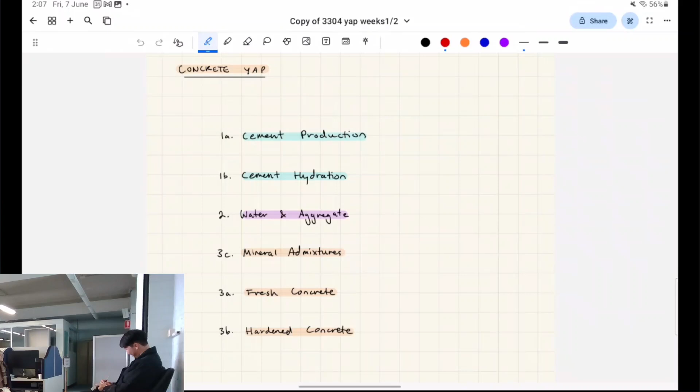Well, basically, here were the week one contents, general topics. Then week two actually went really fast, they covered two topics in one week because they wanted to get to the mechanical properties. I heard they delayed it last year. I think since I was part of Prash's tute, he accelerated us, so we got onto the mechanical properties, but I can't speak for other tutes, they might have happened differently.

Are you guys in Prash's class? No, lucky, I know your guy's pretty decent. It's actually okay, yeah. What about your workshop? Karen. Are they okay? Yeah, Karen. Is she okay? He's okay.

Okay, because I'm trying to figure out how fast I should go. He goes too quickly, like I can't. I feel like my complaint is that he goes too quickly, I couldn't write down anything.

So you guys have all done 2101, right? That's a big part of this first part of the course. What's 2101? Construction, yeah, it's the one you said you did well in. Yeah, I don't know.

I'll let you copy these down, there's not much to write here. But these are based on the names of the lecture files, right? I've also got these in my concrete Google Drive folder, so if you miss it, you can put it down. So that production's a little bit different.

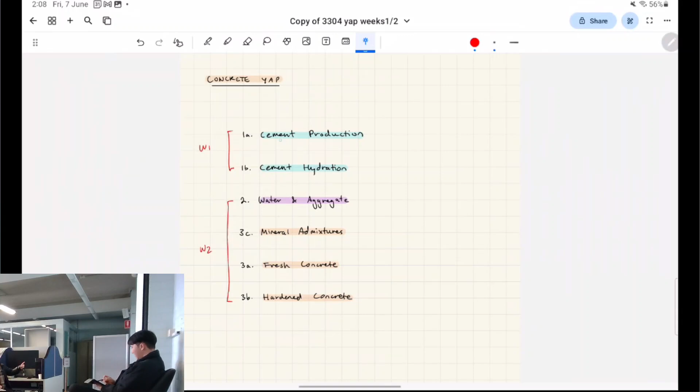Why is it CAB? Is there a reason for that? Three C, three A, three B. Oh sorry, my bad. So basically, I'm gonna teach you 3C before 3A and 3B because it makes more sense in my head, because it's like admixtures before you pour it.

No, because they basically tell you about the ingredients of concrete in this area, right? And then 3C is kind of more related to the ingredients of concrete, like an optional ingredient. But then fresh concrete is about 2101 site processes, and 3B is actually something completely new, it starts going towards mechanics of solids. So I think it makes more sense to order it this way because this is all material science.

So 1A is cement production, right? So basically, as listed here, the ingredients in concrete, you've got your cement, water, and aggregate, made up of coarse and fine aggregates.

It's like baking a cake, right? So concrete is like a cake, and then this is like your egg, water, or which would be like milk or something, I don't know. And then aggregate might be like flour or something. These are all just basic ingredients in a cake, and there's different ways to bake a cake. Then when we talk about admixtures later, they'll be like vanilla extract or these kind of fancy advanced techniques or ingredients that you can add into a cake.

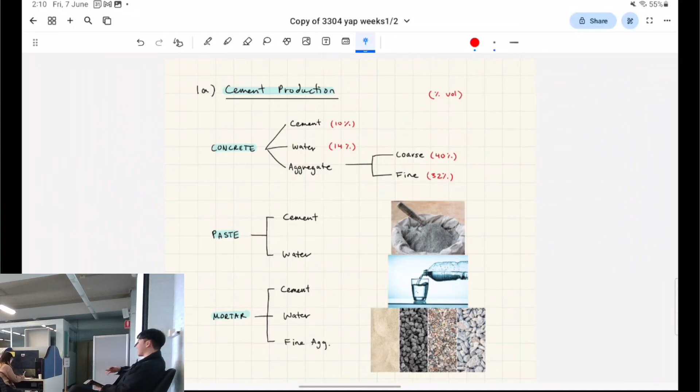The cake analogy will kind of run as we keep talking about it. There's actually a few ways we can compare concrete to making a cake, so it's quite interesting.

I've just included the rough volume of things, so the aggregate will make up the majority of the volume in concrete, right? If you look at concrete, you'll see a lot of the rock particles, that's just the volume you can see. Because cement, if you think about it, will be the most expensive ingredient in concrete. So if you want to save costs for making concrete, you want to think about how we can reduce that most expensive ingredient, I'll talk about that in a bit. And water's the cheapest ingredient, so in terms of cost, water will be cheapest, then aggregate, then cement.

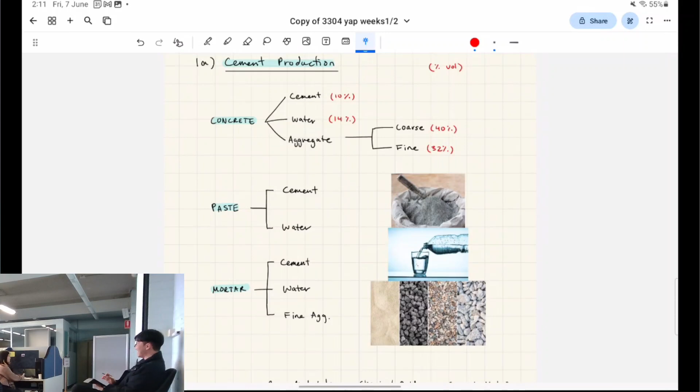Shut up. Okay, whatever. Just pretend this adds up to 100%. Hypothetically. Okay.

So you might have heard the words paste and mortar, if you watched the first lecture. Paste is kind of like used maybe just to patch up a crack in the wall. It's got a lot of adhesive properties, and it's mainly used for aesthetic reasons, because if there's a small hole in the wall, you just patch it up. It doesn't need to be structural.

Mortar is getting a little bit more structural. So in between bricks, you put some mortar, but it has a little bit more structure to it. It's like dough - if you have your flour and water and a little bit of egg in the cake analogy, that would be like mortar.

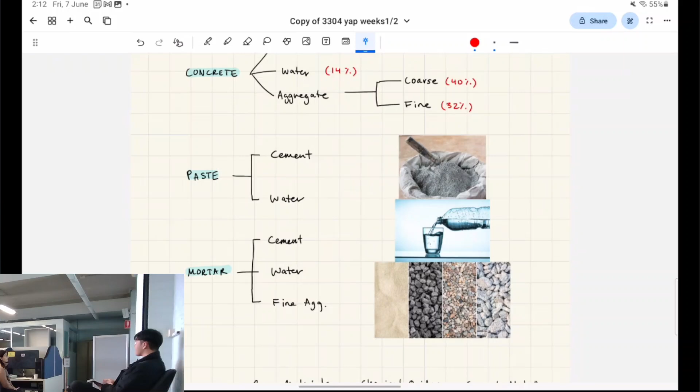Oh, wait, you guys haven't done soil mechanics, right? Oh sorry, you have. Just treat it as if he hasn't done it.

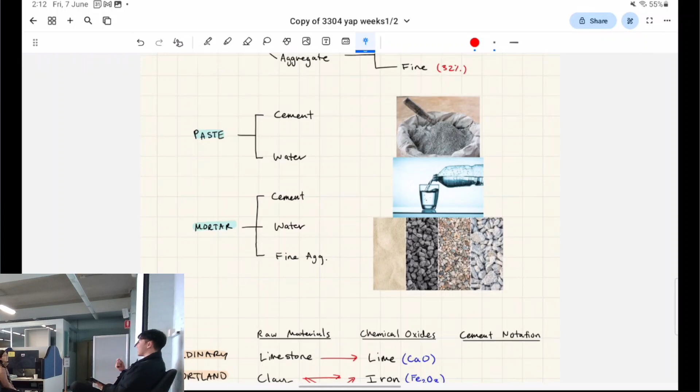What's an example of a fine aggregate? Sand, yeah. So silt, soil - in concrete it'd more be like sand particles. What's an example of a coarse aggregate? Gravel, yeah, like gravels and stuff. You can think of it like the Minecraft blocks - when you're crafting concrete you need gravel and sand. You need the coarse and the fine aggregate.

And then you gotta add water to it, to hydrate it, once you get the dry mix. We have to make a concrete factory in Minecraft next time.

Okay, so OPC, you're gonna hear this term a bunch. This is Ordinary Portland Cement. This is your modern mix for concrete, basically.

They get a bunch of raw materials, namely limestone, for making the cement portion. The important part of Ordinary Portland Cement is that this is the cement part of the overall concrete - part of your cake, let's call it. And so the main ingredient is lime.

When you're making Portland cement, it's heavily reliant on the fact that you have limestone, which is from a limestone quarry. You would dig that out, crush it up - there's all these processes we'll talk about in a second. But if someone quizzes you on what cement is made out of, you can tell them lime or limestone.

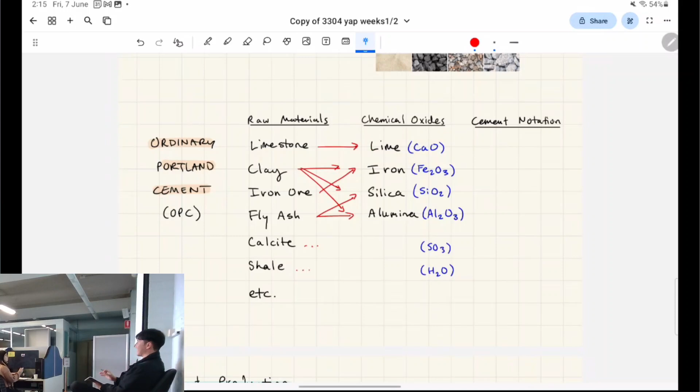So we use cement notation, which is literally the most tradey thing ever. Here's your actual chemical equation for all of these oxides, and we're gonna call these - this one's C, this one's F, this one's S, this one's A, this one's S-bar, and water is called H.

Do you know if in the exam they do the notation or the oxide? They can quiz you on either, but the takeaway from the course, the learning outcome, is understanding it in cement notation because that's the industry standard - that's how you communicate with the trade.

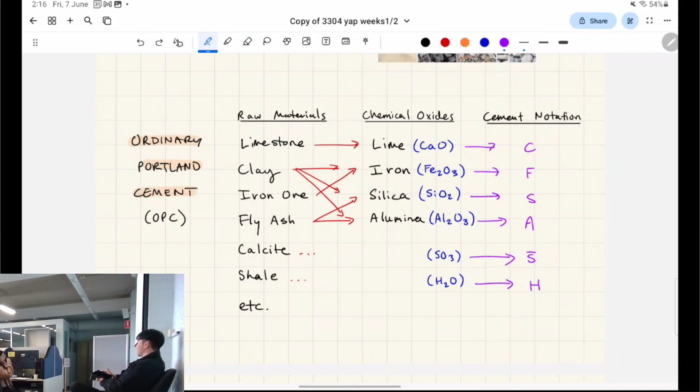Because when we get to more complicated things, these are just the raw minerals. When we get to what is inside clinker, there's going to be alite, belite. In regular chemistry notation, these are incredibly long chemical formulas that you spell out. But for alite, for example, in cement notation it's just C3S - it shortens 3 of these and 1 of these together, so it makes more sense. You break up the smaller things into bigger things.

Any questions so far? Okay, so, cement production.

This is dry kiln processing. So, as I was talking about, you have your limestone quarry. You can use your excavator to extract it, or whatever they use. It needs to be transported somewhere, right?

So through trucks, trucks go into some sort of crusher. So you have your limestone, which is a type of rock, a sedimentary rock you'll learn about in geotech. It gets crushed up into rough limestone and then crushed again until you get a fine powder limestone.

That continues this way, and you're going to add in sand and clay. So now our mixture's actually changed, this composition basically. Instead of pure limestone and whatever else was in the raw materials extracted from the earth, we've got sand and clay in there as well. So I'm going to do it in orange arrows now.

To show that the actual mixture's changed. And then during this whole process, once it gets mixed in and crushed up, it's constantly mixed so that it has this kind of homogeneous texture, if you're looking at it from a big enough scale.

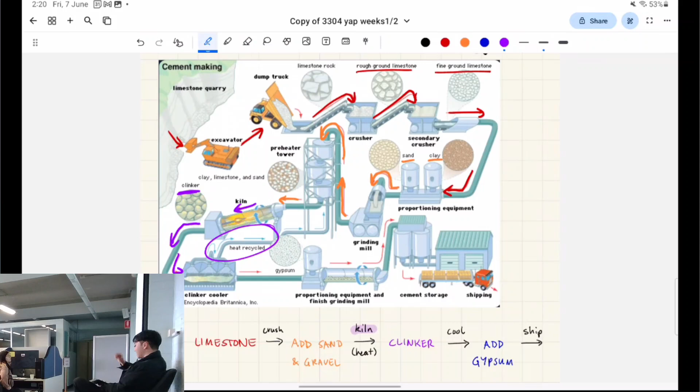Anyway, we continue this purple arrow. It's changed this whole composition. So something else, it's cooled down, the heat is actually recycled into the dry kiln. This is one of the reasons they use the dry kiln instead, it's more energy efficient in terms of the actual factory apparatus. They can suck out that hot air and use it again to power up the kiln. It's just more efficient stuff.

Next you add in gypsum. I forgot the exact chemical composition of gypsum, but it's what they use in drywall. It has calcium in it. I don't want to misquote it, but basically gypsum has a very important function.

Are you okay? Is it from what I told you before? Okay, basically...

Cement, when you mix it with water, flash sets by itself, which is very dangerous. It's like say you have no gypsum in your cement, and then you pour concrete powder on someone, and they just walk in the rain. They'll instantly get turned into concrete essentially, and it's really dangerous. That's called flash setting, or premature setting.

So what gypsum does is basically delay your concrete for a bit and gives it some time before the chemical reaction actually happens. This is really important because when you transport concrete that's just been batched to site, you need like 2 hours or so to make sure it can set before it starts setting, because you want it to flow out of your pump and into the formwork and stuff like that. So yeah, gypsum delays your concrete basically.

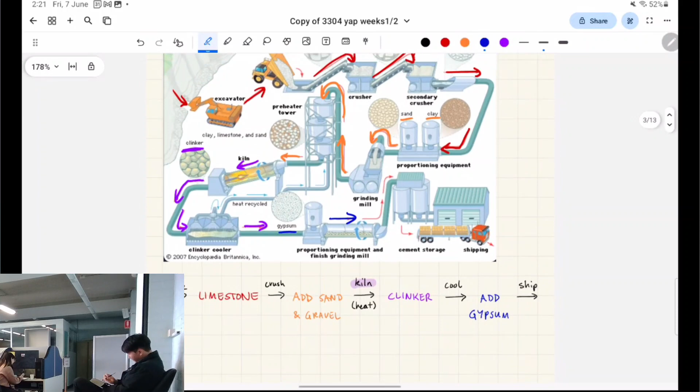Yeah, the cement is stored as a dry powder in bags. You can buy them from Bunnings or wherever else, and then shipped off when it needs to. Does that process make sense? Because that's basically start to finish how it works for cement production.

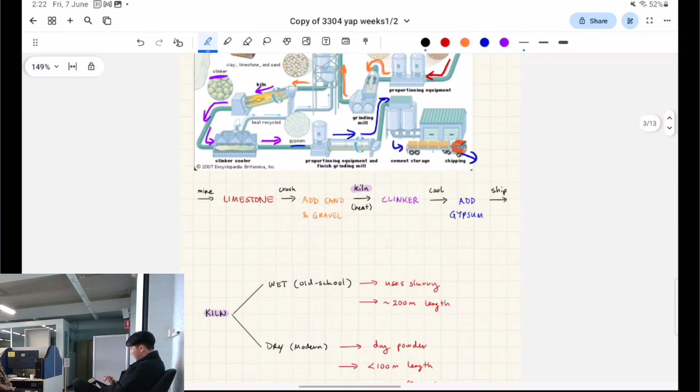Let's go a bit more into detail for the kiln, because that's probably the most complicated process. A lot of these are really simple processes, it's literally just crushing something up, or whatever, or you adding in something.

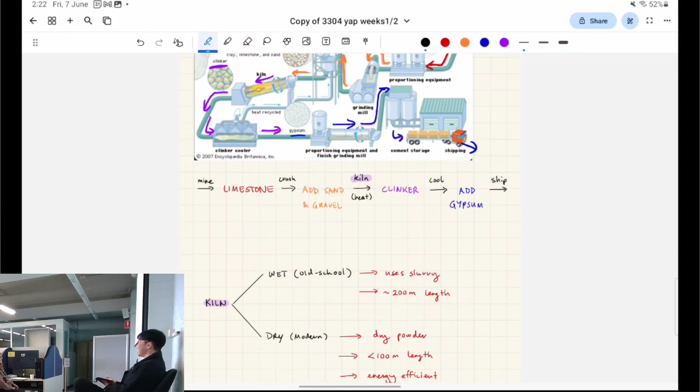This whole thing is a dropper. This is droppers and pistons, furnace, blast furnace. Well, this is the blast furnace basically. This is the kiln. We should get like a Minecraft mod for cement, like the cement making. Borrow one.

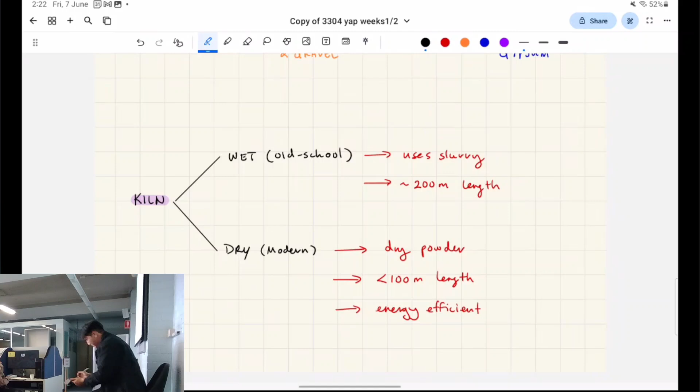So to reiterate, we have the wet processes and the dry processes. The other problem with the wet process is the kiln itself takes up a longer span. It goes for roughly 200 meters, whereas the dry one doesn't need as long. I assume, actually I don't know the exact reason, but because you have to dehydrate in the wet process, they need the extra kiln length, because they don't dry beforehand. That's the main thing you need to know.

It's called sintering, right? It produces something slightly different. I don't know if it came up in the first lecture, I don't think sintering came up. I looked it up though, it's a real word, but I don't think it came up in lecture. Maybe you just randomly looked it up. I remember sitting in that lecture and I feel like I would have known if sintering came up, because it's such a nice word, I feel like it would have flagged in my ear.

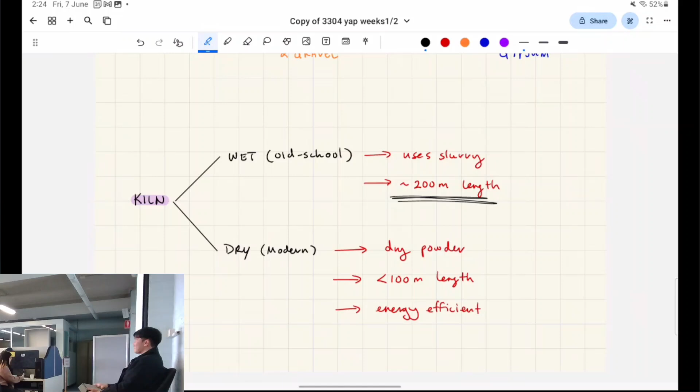Okay, we're gonna continue because we've got just 3 out of 13 pages. Nice, good work. Sorry, do you mind? I'll just keep it zoomed out a little. Yeah, zoom it out. Okay.

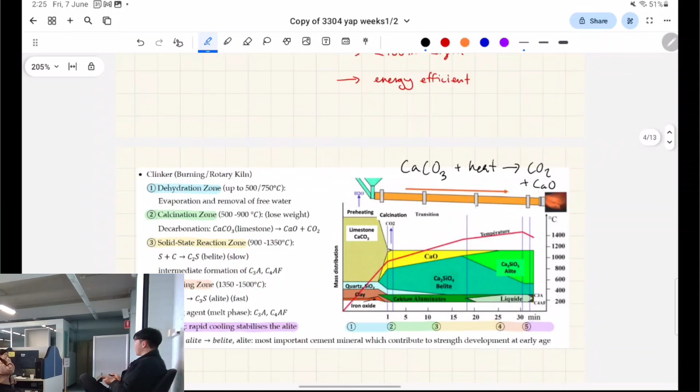This is where the CO2 escapes as well. There's a chemical reaction, something along the lines of producing calcium oxide - this is like the intern version of it, but that's roughly it. It's called a decarbonation reaction, I think, and it gets rid of the CO2. That's why people say concrete production is potentially not that environmentally friendly - it comes from the cement production in this exact equation, because that's where CO2 literally escapes from your limestone and goes into the atmosphere.

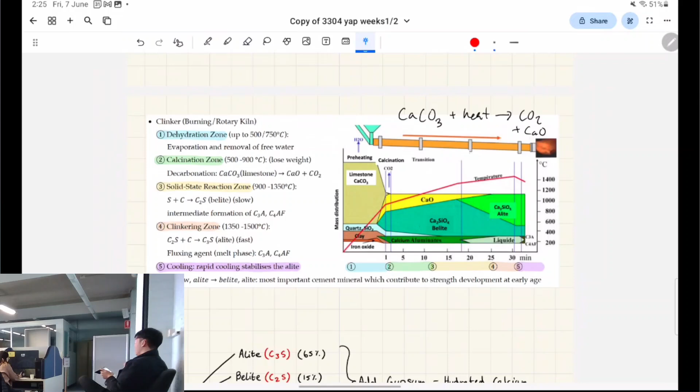Okay, basically there's going to be a few important words that come up here. Belite and Alite, right? These are the clinker - I want to call them minerals. Let's call them minerals. These are kind of like the products of your clinkering process. Belite happens first.

So basically as we go along these stages, the heat increases. The first stage is up to about 500 to 750 degrees, and then in stage 3, around 900 to 1350 degrees, that's where you're gonna start to see Belite slowly form. Belite is not as strong as Alite. Alite is actually what gives the majority of the strength of the concrete. But at the higher end of the temperature, that's when Alite forms.

So I've got a picture, a little tree diagram underneath, which better highlights all of the differences between Alite and Belite. But just know that Alite forms from Belite at a high enough temperature, so we need Belite to form first. But we're looking for Alite, right? Is there a way that we can optimize to get more Alite? High temperature or something.

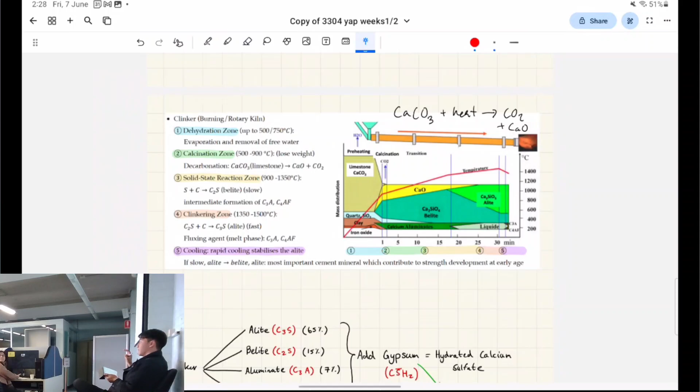That could be your research thesis. Yeah, Taewon's the guy for this. For the first part of the course, Taewon knows the most out of all the lecturers at study level. In terms of reinforced concrete, I bet a lot of lecturers know a lot, but Taewon knows a lot about the material science part of that. I think if someone else who wasn't Taewon took this course, they might not go into as much detail on the first 2 weeks, to be honest. But it's just because it's his research specialty, he kind of wants to yap about it. Because if you do his 4th year course, Max is actually doing his 4th year course. It's called Advanced Materials of Structures or something like that. Yeah, it's about concrete.

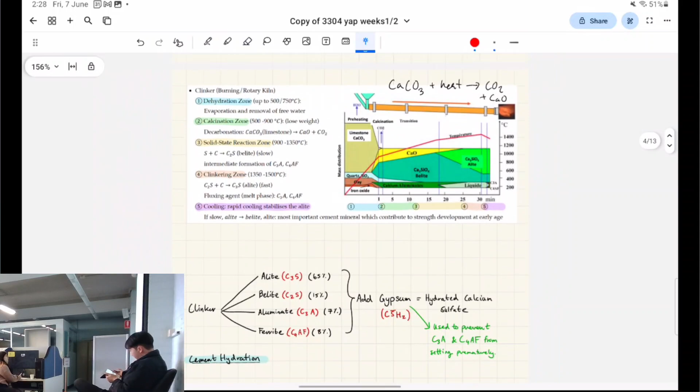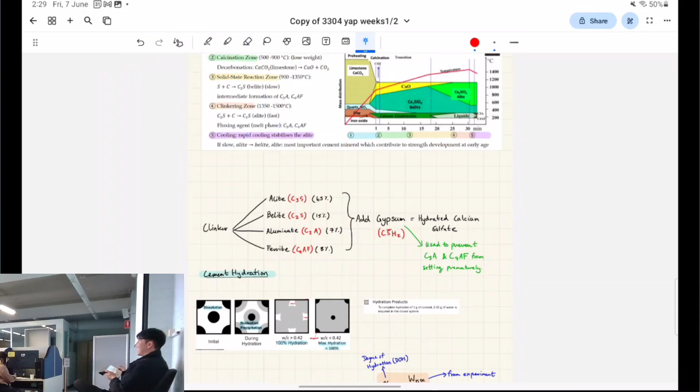Wait, sorry, what's the fluxing agent? Fluxing agent in the melt phase? Flux makes it not oxidize, right? I have no idea, that's what flux... sorry, that might be mentioned in my notes. I'm making shit up. Oh, you were just bullshitting. Actually, could be, but I'm pretty sure that's what flux does. Like when they melt down the metal, they put it in so it doesn't oxidize at the top. Okay, sure, but I can't confirm or deny that. So you can say anything.

Anyway, all of these products in clinker, you're going to see it in cement notation. So there's a dead giveaway once you see the S with the hat on it, then you know instantly it's cement notation, right?

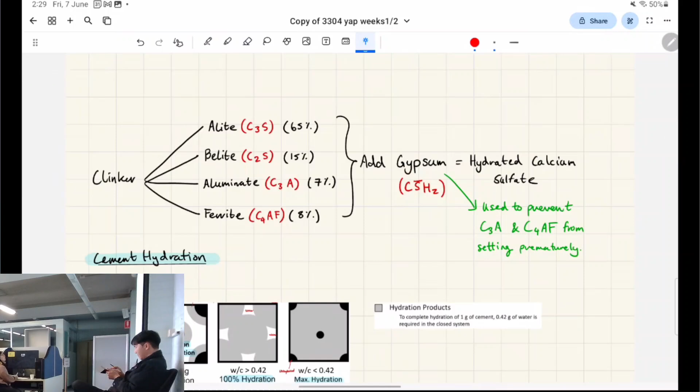There's like a bunch of formulas, and the best way to understand these formulas is literally just to do the workshop questions which involve those formulas. There's a couple listed, and they can be asked in the real exam setting, but literally only one of all of them will probably be asked in the final exam. In terms of what's tested in the finals, for the material science part of the course, it'll be very broad but shallow. So they can ask a lot of things, but they won't be very hard questions. You just do the workshop questions once for each of these types of lab-related questions, and it's fine.

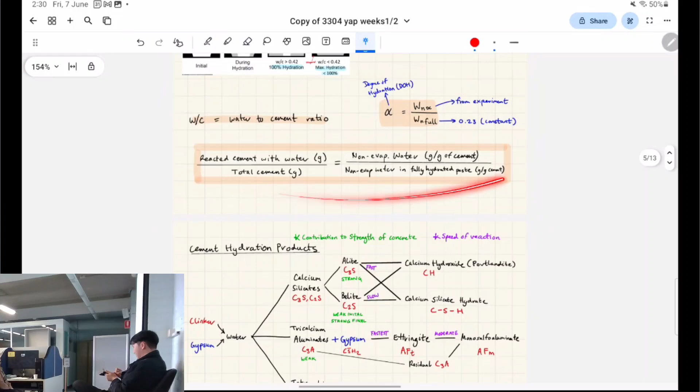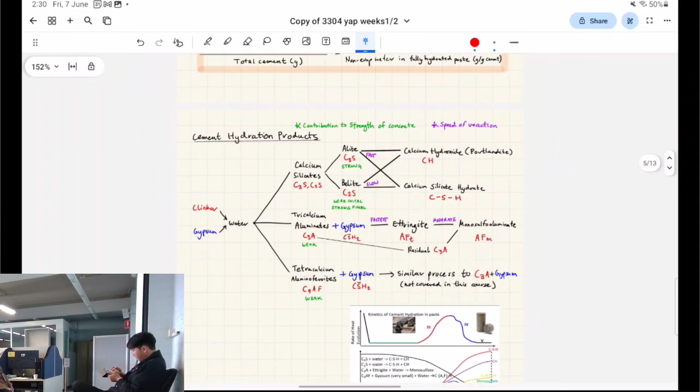But I haven't done it recently, so I can't exactly tell you. It's just to do with the optimal amount of cement to water ratio, so that everything reacts, and you don't have... it's like limiting reagents in chemistry, basically, right? So you don't get bleeding and stuff. Oh, that's not this part - bleeding will come in later for concrete durability. So this is all to do with cement hydration. That literally just means once you add cement and water together, this is what happens.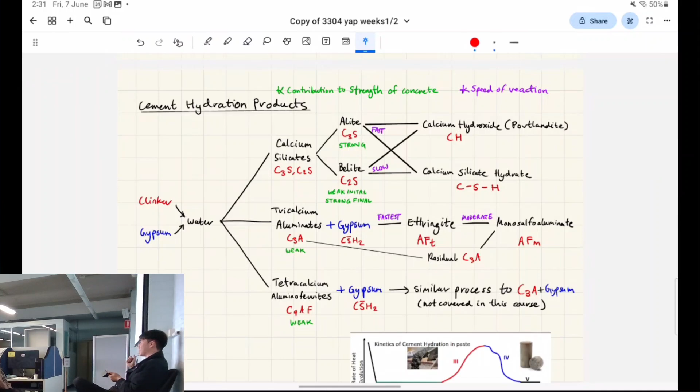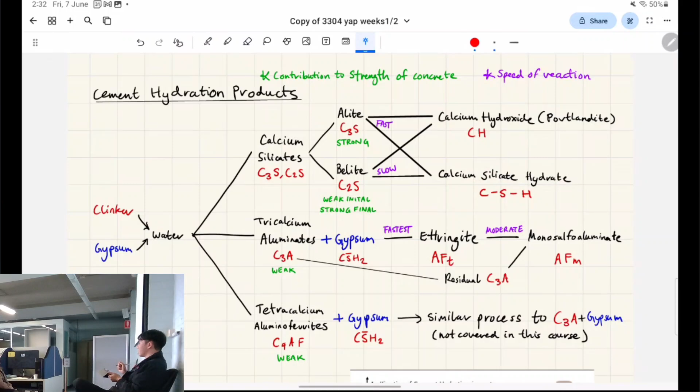Basically, there's kind of these families of the products, right? So Alite and Belite we've talked about are related to each other, but you're looking at these once they react with water. Alite and Belite in the clinker can make CH and C-S-H. This is to do with the bonds in the chemistry, but it has a slightly different notation. I believe CSH is the end product you're looking for - that's the strongest thing, right?

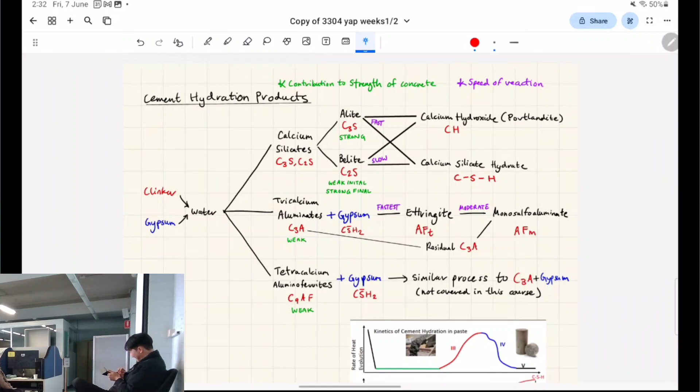Yes, yes, okay, we'll talk about that graph in a second. You'll also end up producing Ettringite - it's like Arjuna's last name. Oh yeah, how do you pronounce it?

Okay, basically in comparison to alite and belite, let's focus on the green part which shows contribution to the strength of concrete. So alite has the strongest contribution.

Belite, you can't underestimate its strength, because at the start it's weak, but then it gets strong. So it's got a weak early game but a strong late game. It will add a lot of strength to concrete later on. Have you seen the graph of concrete strength over time? It's due to belite becoming fully formed, in the curing process.

Belite will fully react into these final products basically. Belite levels up, yeah, levels up. It becomes like Nasus at level 18.

It's like in TFT, 3-item Caitlyn. Oh okay, I get you. 3-star Caitlyn, yeah I get you. Just understand now. TFT terms, okay.

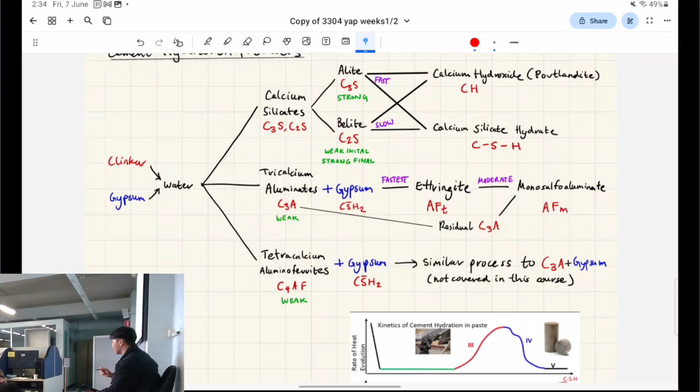Here's the thing, these ones, tricalcium aluminate and tetracalcium aluminoferrite, you can think of them as very similar in terms of the material, the mechanical properties and what they do. But all you need to know is they form with different reactions and stuff like that.

All you need to know is this is the reason why gypsum has to be added in to begin with. It's to slow down these reactions in particular, because these are the fastest. They set the fastest, but obviously you don't want these reactions to set off immediately, like you don't want the concrete to flash set in the concrete truck, because then it's impossible to clean out, stuff like that.

So if you add the right amount of gypsum, you'll time it so that the alite, the belite, and all these things set at the same time, and become the product that you want. So it kind of looks like this, right?

In terms of the heat, at the start when you mix water and cement, no matter what, you're going to get a lot of heat evolution, but only for a little bit, in the first 5 minutes. This is a weird graph because it took about minutes, hours, and days. It's almost like logarithmic.

You'll have about 2 hours from when you add in the water to set your concrete on site to where you need it to be, or ditch it if you can't do that in time. You need to empty out the batch into a waste site or something, otherwise it's impossible to salvage your truck.

Once everything starts happening at once, that's stage 3, according to this particular graph, which you're going to see come up a lot in multi-choice and the finals first part.

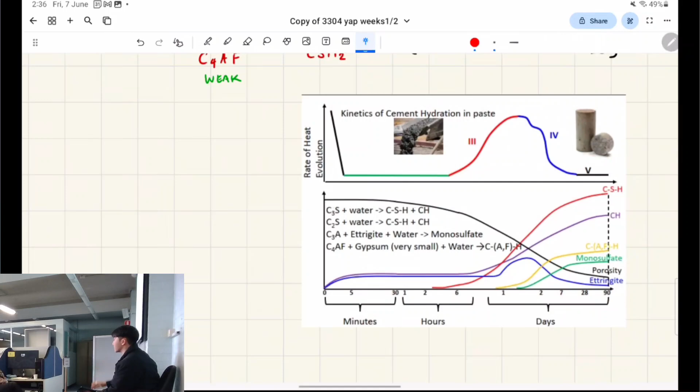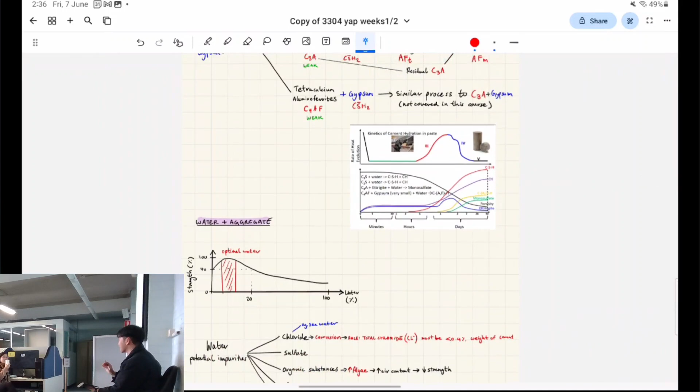Actually, do we get smoko? Yeah, otherwise you're not going to be able to take it in. So I'll switch, hopefully we're allowed to get smoko. I feel bad for Ashar's transport. We're mainly having smoko because I did this. You done? No, smoko, smoko, of course.

How's Divya's course so far, Ashara? Sorry, how's Divya's course so far? It's actually not too bad, I'm enjoying it.

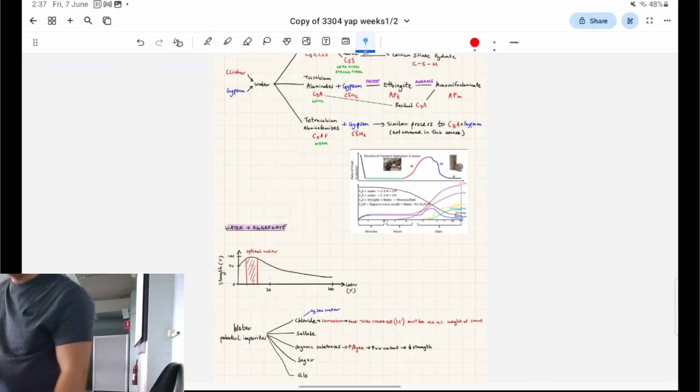Are we recording? It's muted on both ends. Is it, how do you know? I don't know, it's too hard. Did you actually stop it? Still recording. It's us in the exec meeting. Yeah of course, add it on the meeting minutes.

We're gonna survive. Apparently there's something wrong with PDC marketing. We gotta change the MRF ASAP. To what? I don't know. Is it gonna make me cry? No, I don't think so, it's just the prices. It might make you cry because we have to change a lot of the current marketing that we have.

Can we edit the post, right? Oh, you need to remind me. Was it Arab? What happened to Arab? No, they responded, they're coming to WIC. But they don't go to the other things like careers fair or sim. They only care about women. I figured that since they got back to us within 24 hours and they're so big, it would probably be good for us to have them there. I'll need to edit the type post.

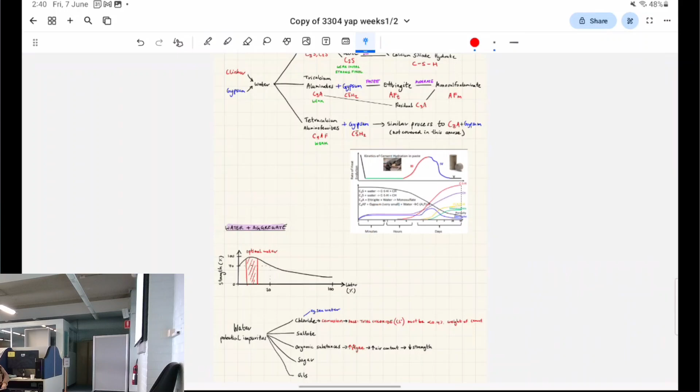No, you did not earn the money, you just got it for free. You didn't earn the money. Oh my goodness, yeah so like, no, you pay $200 and you get a pen that's worth $250. It doesn't earn you $50. And you're gonna use the ink. No, anyway, stop that shark, stop.

Yeah, I actually recently bought a multi-tier desk organizer to put my inks on, so I have rows of inks. It's pretty, this makes financial sense. I actually calculated it recently, because she's gonna use the ink anyway, she's gonna buy the ink, right? And she's gonna use the ink with her original fountain pen, so why not just get a pen for free with it? We're actually on time. Yeah, unlike a borrow truck.

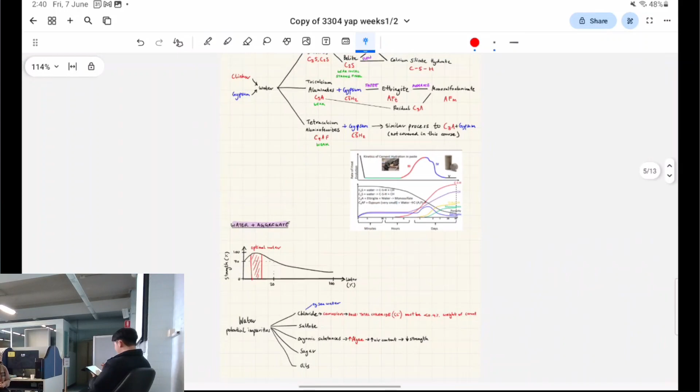Okay, basically I just want to reiterate these first 2 weeks have the most material science, that's not my strongest suit. Wait, let me just check. Yeah, once it gets into like the mechanics, solid mechanics, statics, it'll be less wishy-washy, right? So just bear with me, we'll be making shit up right now.

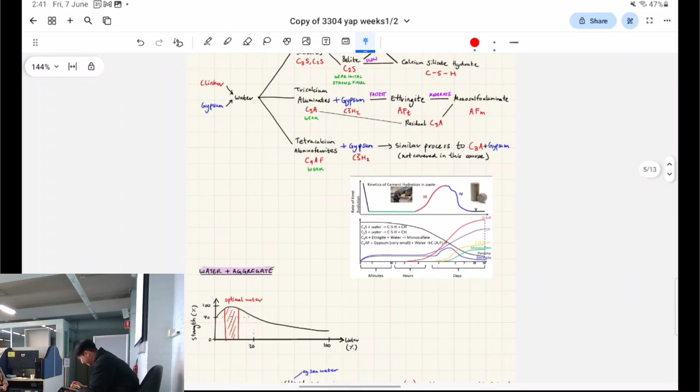So there is an optimum water level. This is specifically for the purpose of strength, but you can compromise the strength a bit for workability reasons. Like say you need to push it through a 50-meter boom pump, you might need high workability. There's all kinds of balancing acts you have to do when mixing concrete. Basically all you need to know, the rule of thumb for water is: if you can drink it, it's good enough for concrete. I know that sounds dumb, but it makes sense because it won't have your chlorides, your sulfates and stuff like that.

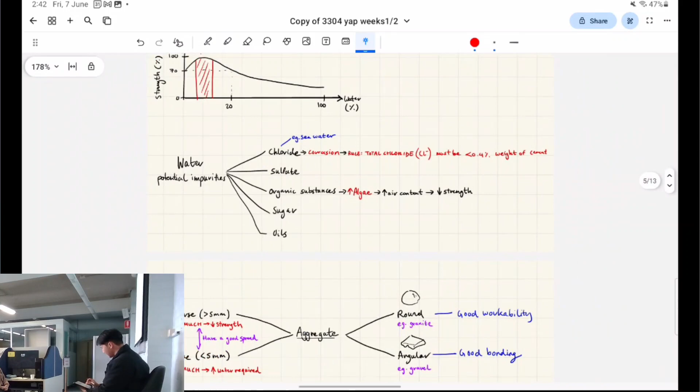You won't have these impurities, right? So generally, when you're mixing concrete, use potable water. Just drink it - the drink test. Get the intern, if you don't get an E. coli infestation, then you pour the concrete.

Wait, why do they care about sugar? How is there going to be sugar in the water? It was a tactic from a revolution - people would actually put sugar in it to sabotage a concrete mixture because it can't set if there's sugar in it. It was an active protest, like people would actually pour sugar in. But sugar is expensive, how do you get all that sugar? Well, fuck the government, right? Pour sugar anyway. So it just doesn't set at all? Yeah, you can't set - it's like complete ED.

It just would never work. Okay, so that's basically water. Aggregate is the other part.

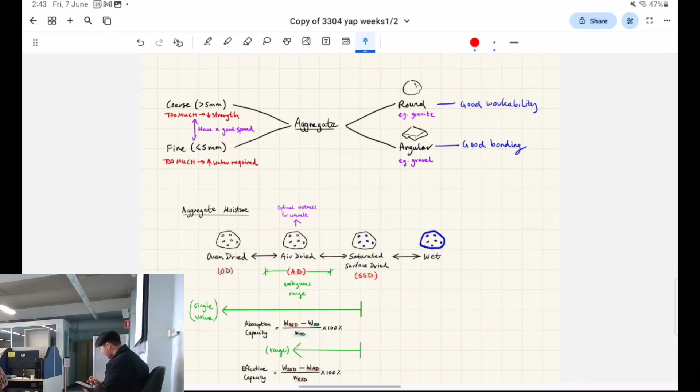There's a few ways to measure aggregate. One is size - we've talked about coarse aggregate, fine aggregate, I won't get too much into it. There are official definitions based on threshold numbers, like 5 mil. The other thing is shape. Different kinds of crushed granite will be rounded, and gravels will be more angular. The shape of these particles makes a difference because even though it's a small scale, it adds up. Workability is better with round particles - the cement can slide between them more easily. Angular is better for bonding because it slides together less, so it bonds better. That makes sense, right?

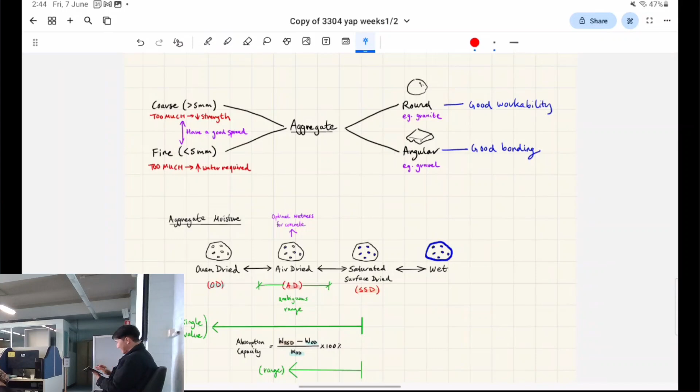There are some definitions for aggregate and moisture level. As we were walking up from Dom's concrete class, he jokingly said why don't we just grab this gravel and sell it to Boral or something. But it wouldn't work because it needs a specific moisture content. It was literally just some random gravel he found on the ground, but for it to be useful, you need to know exactly how much water content there is, so you know how much water to add for that optimum level.

There's air dried, like on a sunny day. Oven dried means there's no water because you boiled it all out. Saturated surface dried would be probably something like after a rainy day, where the surface is dried but inside the little voids will still have water. And then completely wet is like submerged particles - fully saturated.

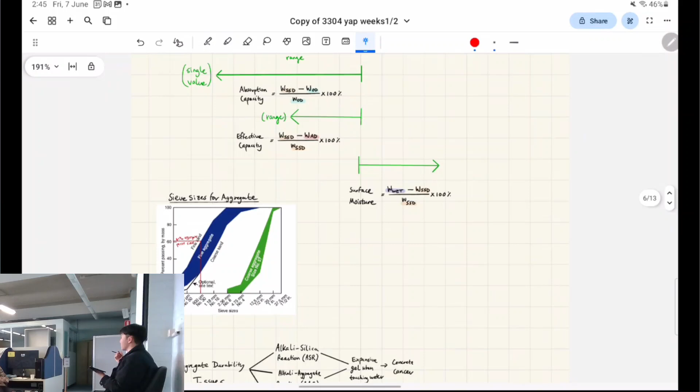Sieve sizes, kind of makes sense. So maybe if you're baking, you have these different sieves of different finenesses, and if you want to aerate your flour to make a fluffier cake - anyway, point is, sieve sizes just filter out various particle sizes.

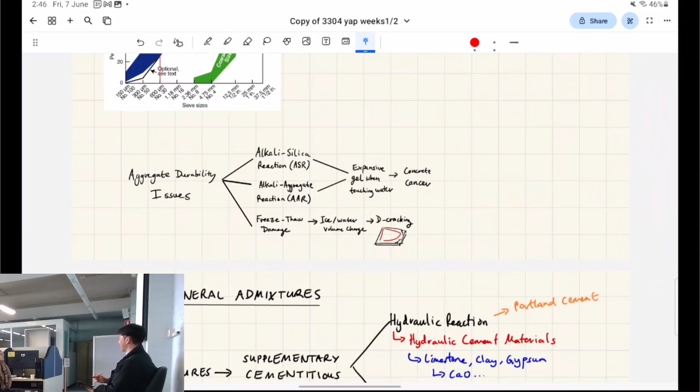There's durability issues. When talking about durability, think about a diamond sword in Minecraft - durability is the ability for something to last over time. For concrete and structures in general, you want things to last for like 100 years or more - you're designing them to last. And then there's all these chemical processes, chemical attacks that can happen to make it break faster. This is like Unbreaking III, you know what I mean?

There's a term, kind of a fun word - concrete cancer. Concrete cancer is due to these reactions, there's alkali silica and alkali aggregate reactions. Wasn't there another word for it? Something like... not molding. Scalding? Spalding, yeah - not molding, that's due to fire. Though I think it's scalding... well, I could be thinking of something else.

Sorry, you can Google it.

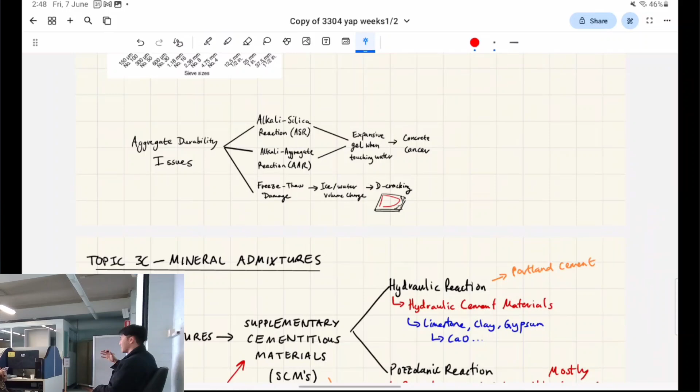I'm pretty sure spalling is fire damage on hardened concrete. Like how steel melts in fire, concrete will spall - it damages the surface and affects construction integrity in super hot fires. In general, concrete is better than timber and steel against fire damage, but it can still get damaged, and that damage is called spalling. I'm pretty sure it's spalling, but I could be mistaken. I was thinking of a different thing for concrete cancer, and spalling I think is correct. I think I was thinking of the wrong word.

Spalding? Oh, is that what - Spalding, I was thinking of Spalding. Oh, it doesn't matter, okay.

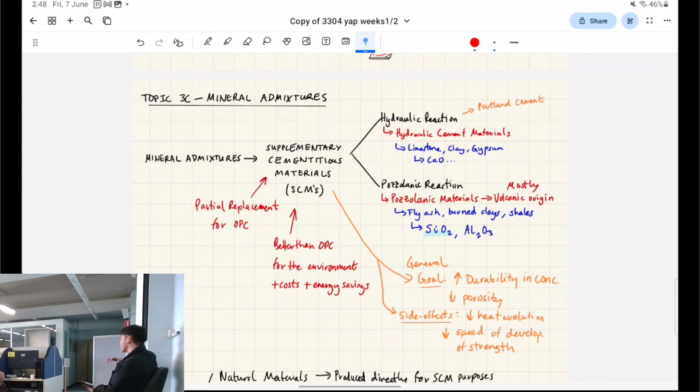So, mineral admixtures - we've jumped to topic 3, but I'm doing 3C because this is still chemistry related. Admixtures are also called supplementary cementitious materials, SCMs - that's a synonym for admixtures. Let's go back to the cake analogy.

Your regular cake might be made of eggs, flour, water, maybe milk - that's your OPC. You can choose to change up the base of this recipe. You can use mayonnaise instead of eggs since it has a bit of egg in it, or Coca-Cola instead of baking soda or something like that. These are all ingredient replacements - these are SCMs, so you're making a different type of cake.

But they might be advantageous in certain ways. Basically, your OPC, your Portland cement, undergoes something called a hydraulic reaction - that's everything we've talked about so far: limestone, clay, gypsum, that kind of stuff.

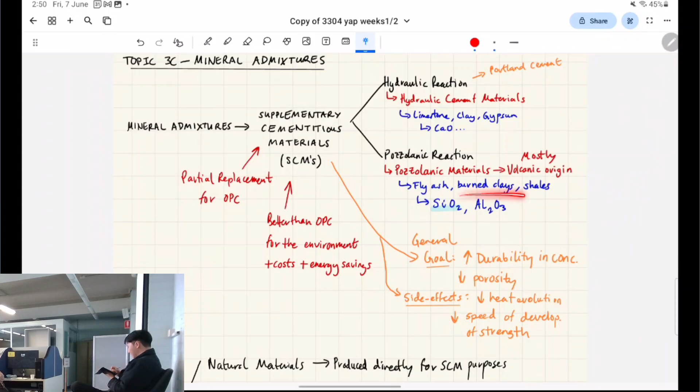A pozzolanic reaction comes from adding these funky ingredients, mostly from volcanic rock - so fly ash. Well, fly ash I'm pretty sure is from pulverized coal. Anyway, let's not get into it since I haven't researched this fully.

Basically you just need to know the chemical reaction can be gauged on a linear scale. On one end, you might have a hydraulic type of reaction - that's like OPCs.

Is he doing concrete? Yeah. Hello - my stuff ended early, so I was wondering if you guys needed help moving stuff down. Oh yeah, no, all good, we don't need it yet. Super, you sit for the concrete stuff, we're gonna go for 10 more minutes.

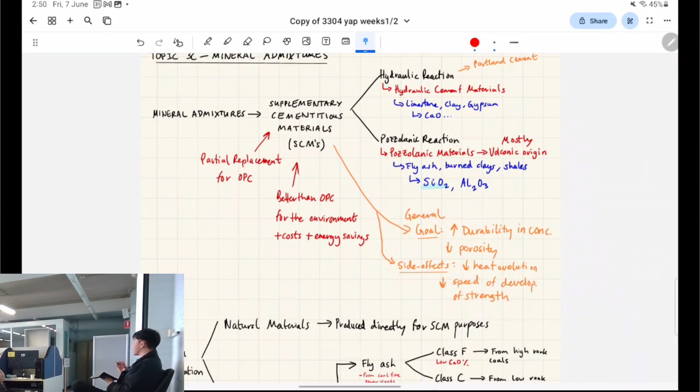So on one end, hydraulic reactions, that's OPC. On the other end, you have your pozzolanic reactions.

Basically fly ash is from coal fire power plants, so these are usually byproducts - these ingredients are taken from other industries. In power plants which use coal, they get the remains and can make fly ash from that.

They also have cremation. Oh really? Fly ash? Oh shit, okay, well there you go. Where is it, there's a bunch of stuff. They probably wouldn't get someone's cremated ashes and put it into cement, but who knows, right?

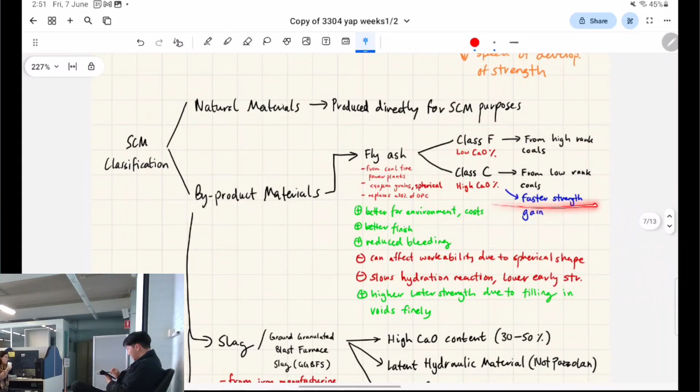There's different classes of fly ash - Class F, Class C - you can read the pros and cons. Then there's slag, also called ground granulated blast furnace slag, GGBFS.

This one isn't a pozzolanic reaction, but it gives a latent hydraulic reaction, which - okay, I don't know what that is.

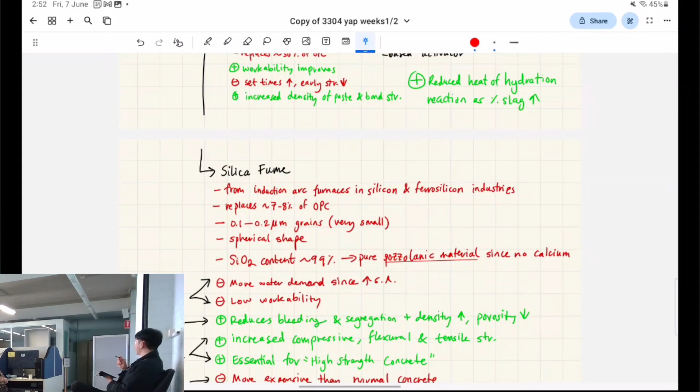Thank you. Silica fume - this is the most pozzolanic, a purely pozzolanic material. This will give the most extreme, different type of cement mixture you can get, and it's used for ultra high strength concrete, UHSC I think it's called. Its properties are generally quite different - it will be more expensive, much stronger, used for high strength concrete, much more durable, but there are trade-offs for everything.

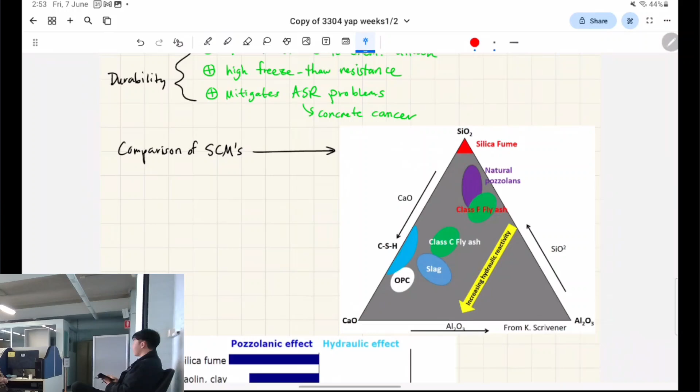OPC is the most hydraulic in terms of its reaction, and that's due to that line. Silica fume is as pozzolanic as you can get, and all this other stuff falls somewhere on that linear scale. There's many ways to classify what I've just said on different scales.

Pozzolanic, OPC - I mean this just says cement, but this means OPC cement.

Is this week 1? Week 2. You're not good, it's okay. Week 2, like the other half, right? Yes, okay, I've actually jumped forward and then jumped back because I'm just grouping the chemistry together.

So here's back to CVEN 2101 construction - this is fresh concrete, I understand this so much easier. I'm going to run over this fairly quick since you've already done 201 and it should make good sense. You have batching, mixing, transporting, consolidation, finishing, curing, and formwork removal.

The general process to pour concrete: you set up formwork. The chippies set up formwork - that's another word for a carpenter. They work with the timber and lay out the shell which the concrete will be poured in, and then you get the steel fixers in.

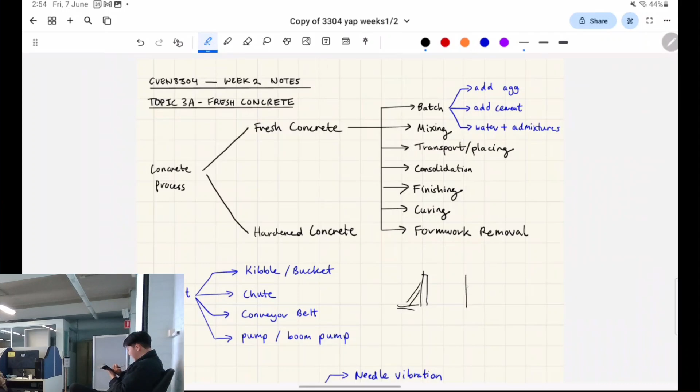The steel fixers - actually let me pull this up. Your formwork might look like this with its supports, made out of wood, and that's the ground surface. Then the steel fixers set up these chairs, made out of plastic. They're a sacrificial way to elevate the steel, since it's going to be poured over essentially. It's so the steel's not too far or too close to the edge of the concrete, because otherwise there'll be durability issues - when steel is in contact with air you get oxidation.

Corrosion, stuff like that. Concrete cancer? Not quite, not that. Concrete cancer is due to something with alkali - or whatever it's called.

Anyway, get your rebar in - normally get your axial bars in first. In cross section, these chairs will sit, and the rebar will sit on that. Then you slip over your shear bars, which you'll learn about as well - say it looks like that. All the axial bars get put on first, and then there's actually a few words for what comes next.

You'll learn this more in week 7 - stirrups, ligatures, shear bars, that rectangular shaped thing that forms the cage. Then you get your closing shear bar, and it'll look like a skeleton, all made out of steel. Then you pour the concrete in, like that.

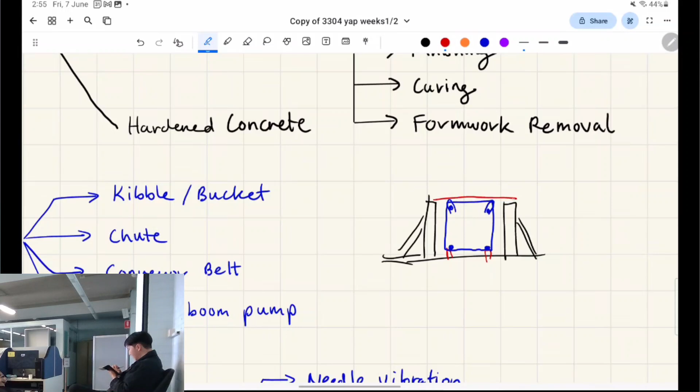That happens on a pour day where everything happens within the span of 4 hours. From the point where the concrete gets batched by Boral, the on-site work has to happen all within like 2 hours or so.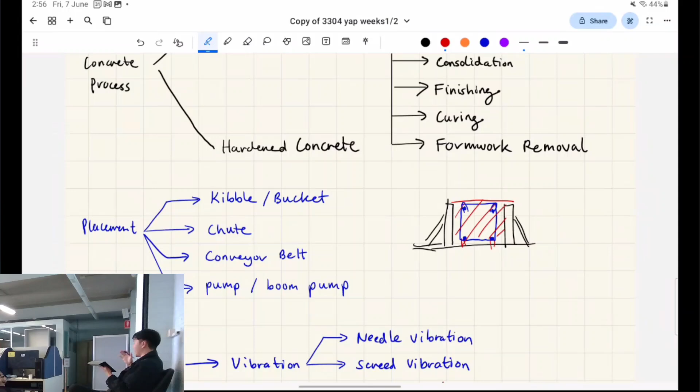Then the formwork gets removed once the concrete is set - you do all the curing and stuff as well, and once that's all set you remove the formwork. That's generally how it goes, and the steel of course stays inside the concrete. That's how you make reinforced concrete.

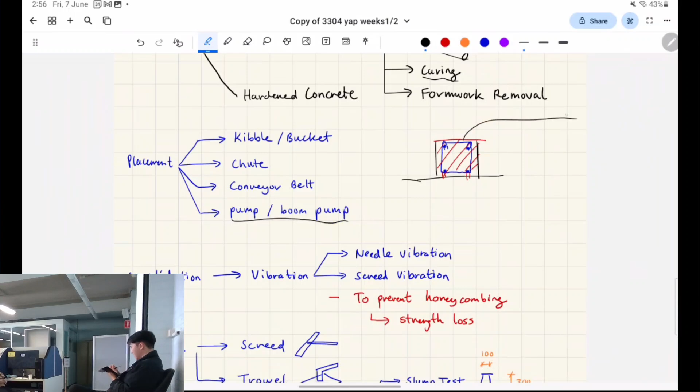There's just a few different placement methods. The pump is for when it's hard to reach. The chute is basically directly from the truck's mouth - there's a little chute that shoots out the concrete basically. That's the most basic method, used when you have good access with the truck to the formwork.

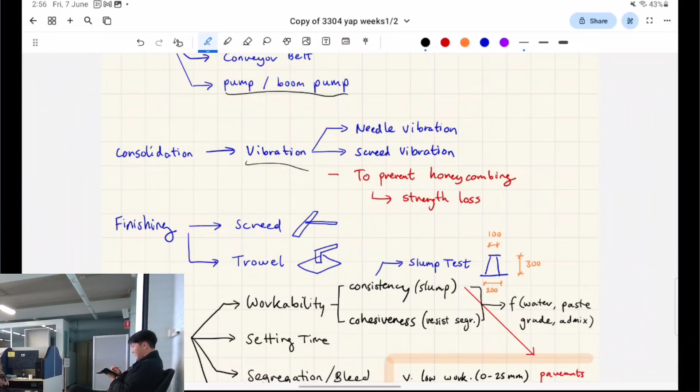You need to vibrate the concrete to pop all the air bubbles - Dom covered this pretty well in his 201 crash course. It's less strong when you have a bunch of air bubbles, because you drop the concrete and it naturally gets air bubbles and pockets from being moved.

It's like a cake - you gotta vibrate it to get the air bubbles out, otherwise it's gonna crack when baking. Like how you put your cake batter in the oven and cook it and it becomes all solid - that's basically concrete, except concrete's chemical reaction happens outside of an oven. It naturally heats up once all those reactions hit, and the gypsum delays that setting for the other minerals.

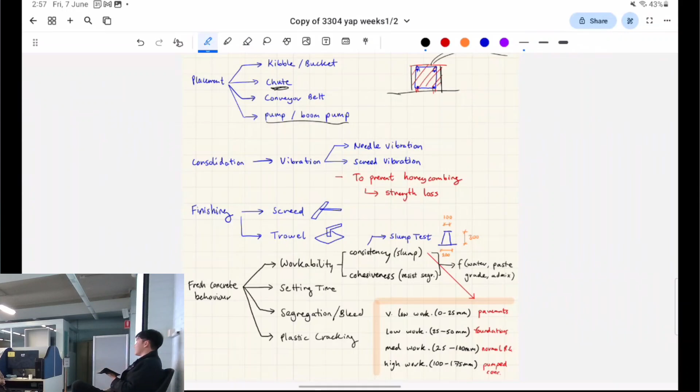Alite and Belite, okay cool. And finishing is just to make sure it looks nice, like icing the cake with a trowel. Pretty much, yeah. It's just to make it look nice and stuff.

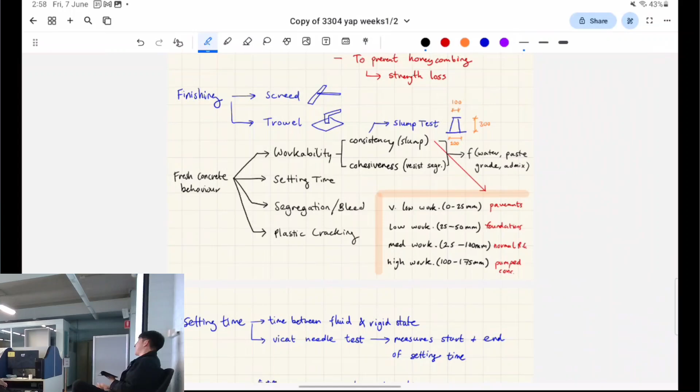And if a cake gets too dry at the top, it'll start cracking as well, right? Actually, I don't know much about baking. I'm not talking about baking analogies. Sure, okay yeah sure, okay.

Is there anything on fresh concrete? We've talked about this, let's talk about this - segregation and bleeding. Actually I have a diagram for that below. Segregation, okay, maybe we'll just quickly talk about the workability.

For stuff like pavements, generally it's advantageous to have a low workability just because it'll be stronger. But with pumped concrete, you need a pretty high workability right away or it's not going to go through the pump, essentially.

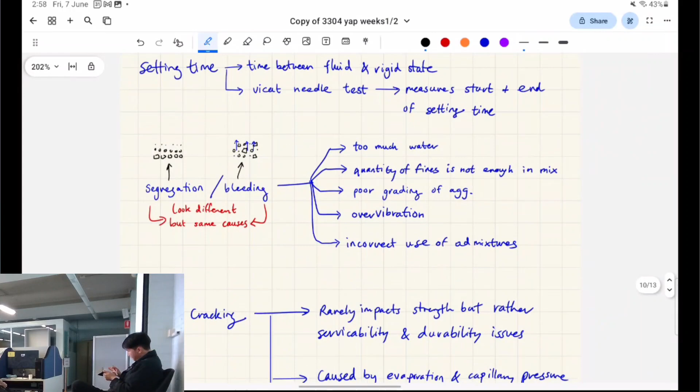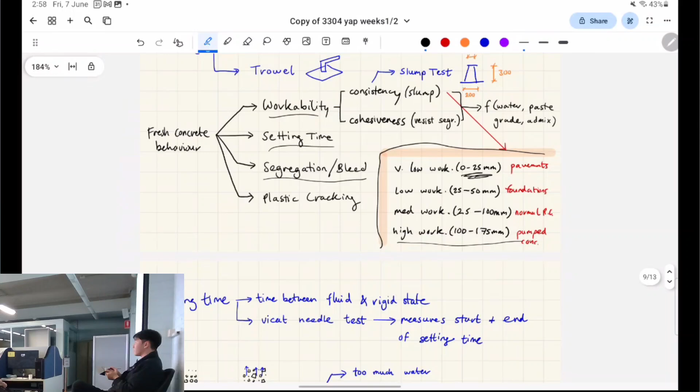So yeah, what were those numbers next to the factors, remember? Because this is- yeah. Oh, these are the slump amounts. Yeah, but there's also factors in the slides, so you need to know those. I'll look it up right after we're done. I saw some and I'm like, what? Because I haven't seen that graph, at least not recently.

Okay, basically these two are concrete defect types: segregation and bleeding. They look different, but they're caused by all of these things - too much water, over vibration, incorrect use of admixtures.

It's funny, back when I went to CBD, I looked at a training module made by Transport New South Wales, and the first thing they said was: good concrete is made up of aggregate, water, and cement. Bad concrete is made up of water, aggregate, and cement. It's the same stuff, but so much can go wrong if you mess up any of these steps.

Same thing with a cake - even if you have the right ingredients, if your ratios are wrong, you don't mix it enough, or you put it in the oven too long, all these things matter. It's just like making a cake, basically, right?

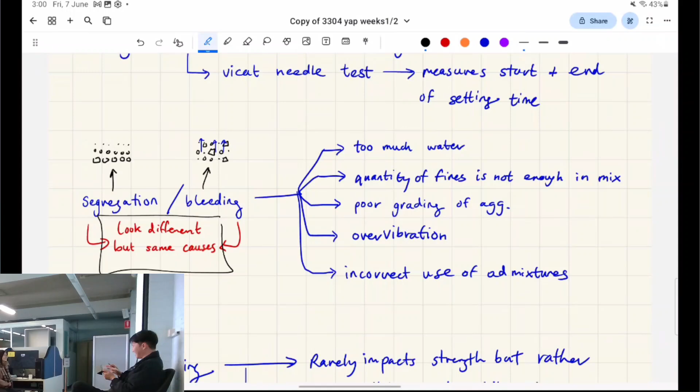Anyway, segregation and bleeding. Segregation is where your fine aggregate goes to the top and your heavy or big aggregates fall to the bottom. Bleeding is where the water seeps up to the top and it's not homogeneous anymore - you have the wrong ratio of water and other stuff.

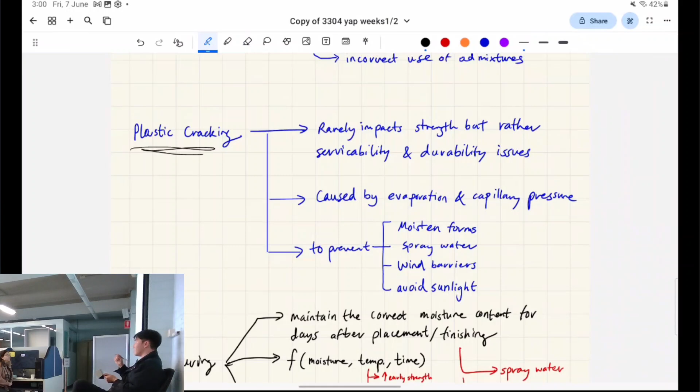Plastic cracking - obviously this is cracking, but specifically cracking in the fresh concrete stage. When it becomes hardened concrete and starts cracking, that's called dry cracking. So it's just classifying the cracking based on the stage at which it happens during the concrete's lifetime.

So this is why you cure it, to avoid plastic cracking - that's where it evaporates too much at the surface, right?

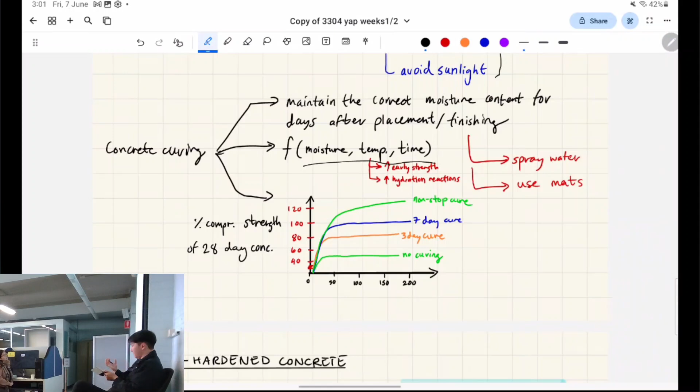Yeah, so this is a pretty nice graph, right? Basically the concrete's curing depends mainly on three things: moisture content, temperature, and time. Probably the least intuitive is temperature - even a small increase in temperature outside will affect the evaporation rate at the surface, even a little bit.

I guess you can think of it like when you're drying laundry on your balcony - even a small temperature increase from outside will change how fast your clothes dry. It might not be anywhere close to boiling temperatures, but yeah, a small temperature difference will make a difference.

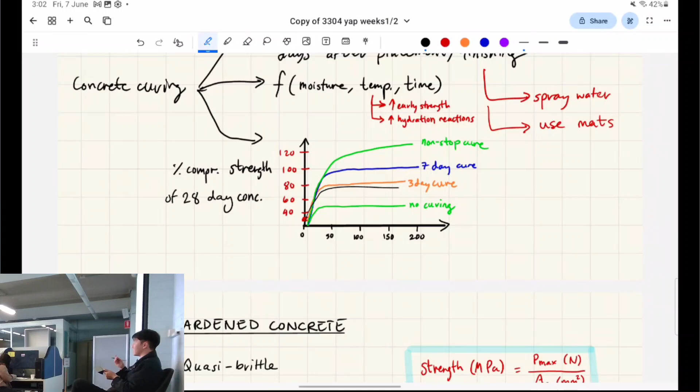So when you cure the concrete, it's really important for its strength, just because if you don't cure it long enough, it's not going to be able to go through all its chemical reactions properly, due to all the previous reactions I was talking about.

Yes. Okay, you know what, I might talk about hardened concrete next time because this is where we start getting into mechanical properties. So I figure this is a good point to break it off.

Do you see why I put 3C before 3A and B? So this groups well and nicely with the week 3 content. Okay, thank you, all good.

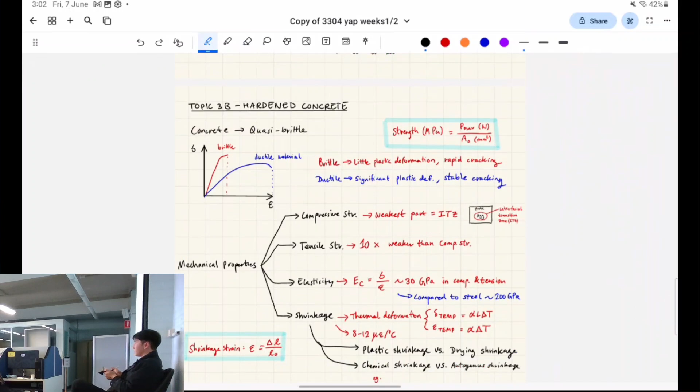Alright, I'm gonna stop recording. Hey, no passing.